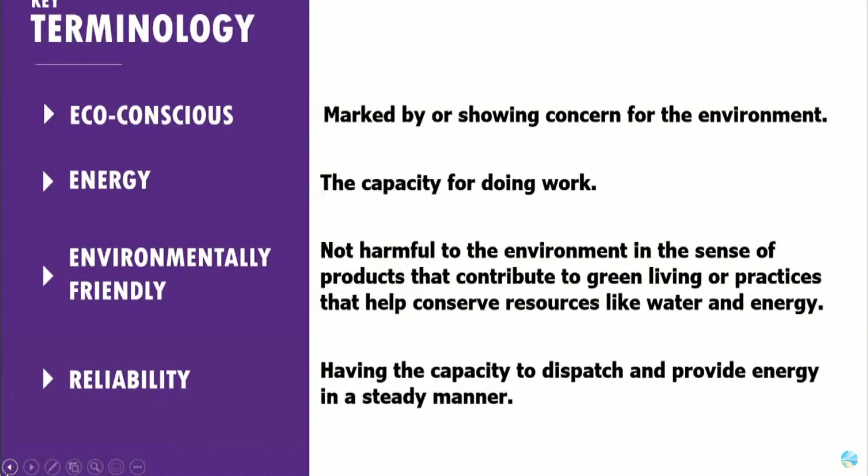So what is renewable? It's quite simply energy from a source that is not depleted when used, and quite often the fuel source is free. Resiliency is the ability of a piece of infrastructure, system, environment, or community to sustain or recover its essential functions when presented with a disruption. And finally, of course, sustainability: meeting our current needs without compromising the ability of future generations to meet their needs as well.

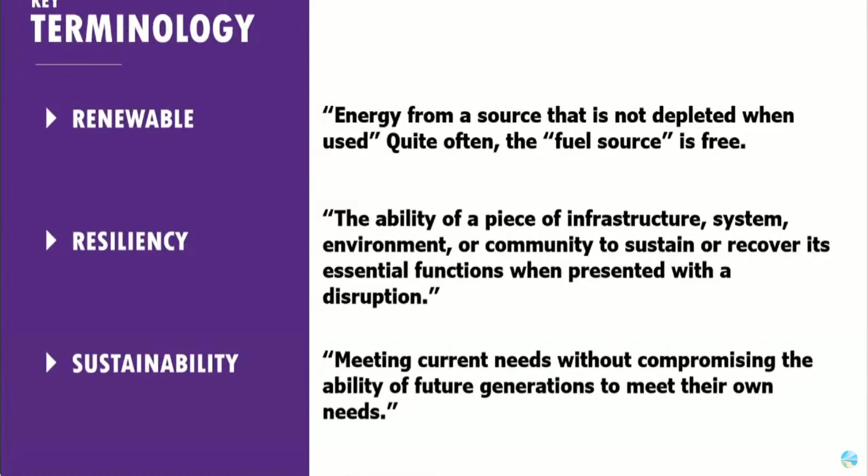So if we look at this landscape, let's just start simply. What does energy look like right now? In the United States, it's a very diverse energy mix: 34% is natural gas, 35% is oil and petroleum, and the rest consists of nuclear, coal, and renewable energy.

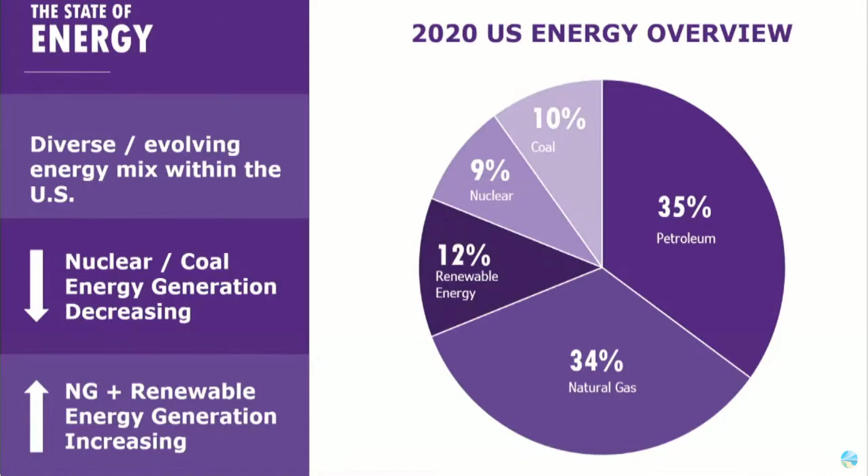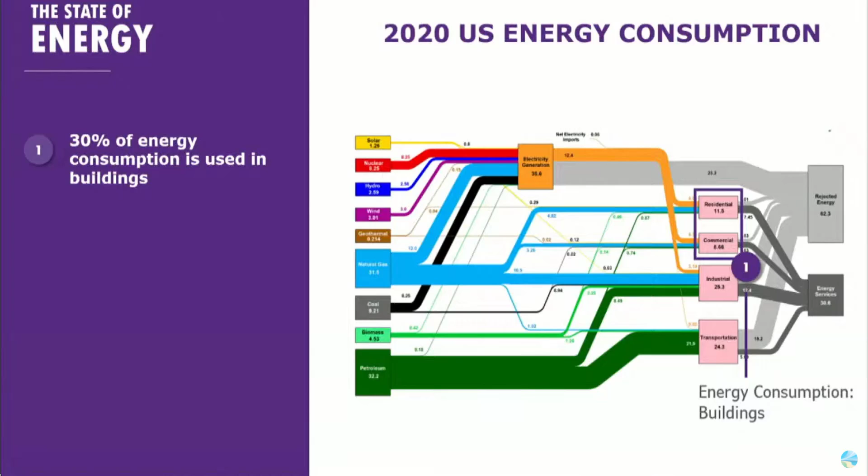So what we're seeing is that nuclear and coal energy generation is decreasing, while natural gas and renewable energy generation is increasing. If you look at this Sankey chart, a flow chart essentially, not quite as scary as perhaps it looks, 30% of all energy consumption is used within buildings. Natural gas is an integral part of that, so around 40% of all energy within the United States consists of natural gas.

In fact, 40% of electric generation on average in the United States is natural gas, 75% in Florida itself. And then you see the rest made up of nuclear, coal, et cetera.

So renewables are on a significant growth trajectory, right? We all know this. So what do we do about that, and how do we harness that? Unfortunately, two-thirds of this energy is lost. From primary source energy, from where we get it from the well or wherever it is, unfortunately we lose two-thirds of all that energy. So there's significant opportunity there.

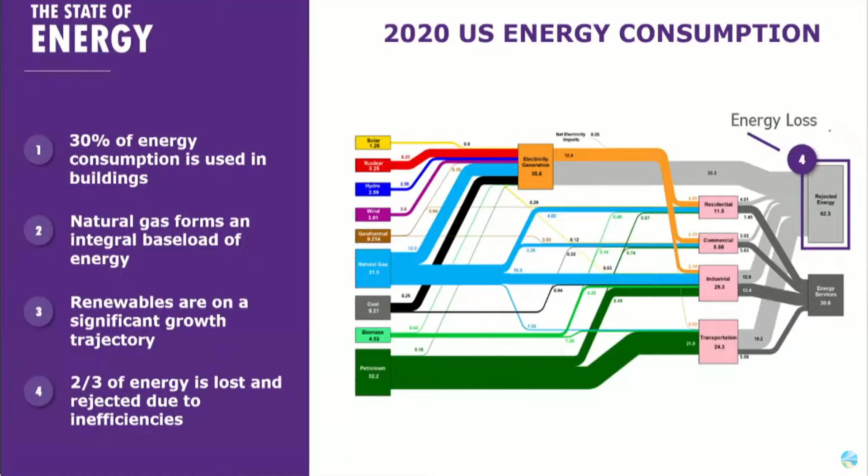So if you look at the natural gas infrastructure, it consists essentially of production, transmission, and distribution. Pretty straightforward. And as you can see, on the transmission side, some of that is used directly in industrial applications, but it's also used for gas power generation.

Within the state of Florida, 75% is used for electric production. The rest is made up of nuclear, coal, and renewables, and very little hydro, I believe.

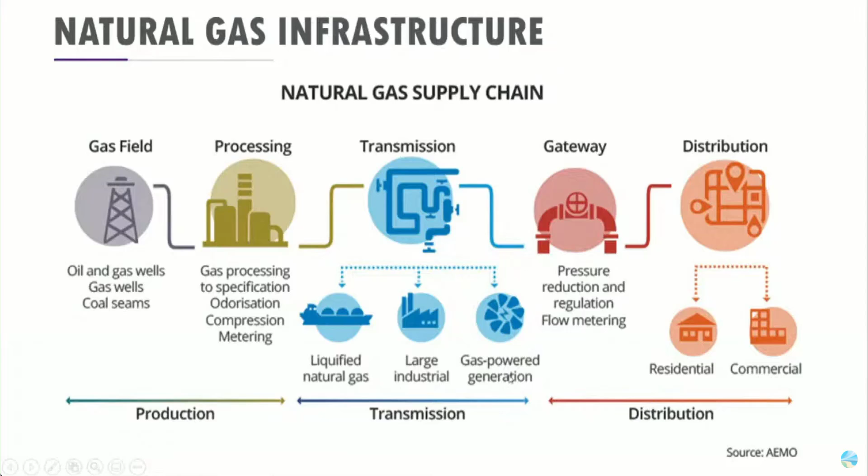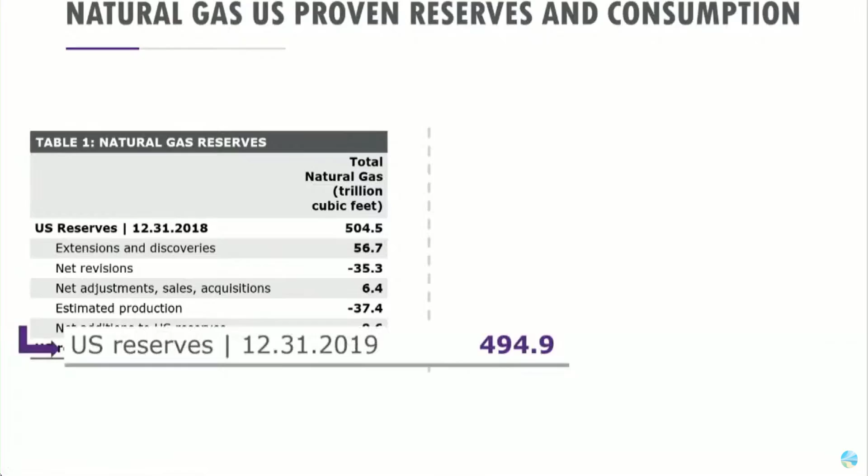So what are our natural gas reserves right now? We have close to 500 trillion cubic feet of natural gas within the U.S. itself. These are what's called proven reserves that we know of and can access right here. We have much larger reserves as well, which I'll talk about in a minute.

If you see that consumption, some amount goes to electric power generation within the entire U.S., and a lot is also made up of residential, commercial, and industrial use. We use around 30.5 trillion cubic feet. You can do the math: if you've got around 490 trillion cubic feet of proven reserves, and we're consuming around 30.5, you get around 16 to 17 years available within the U.S.

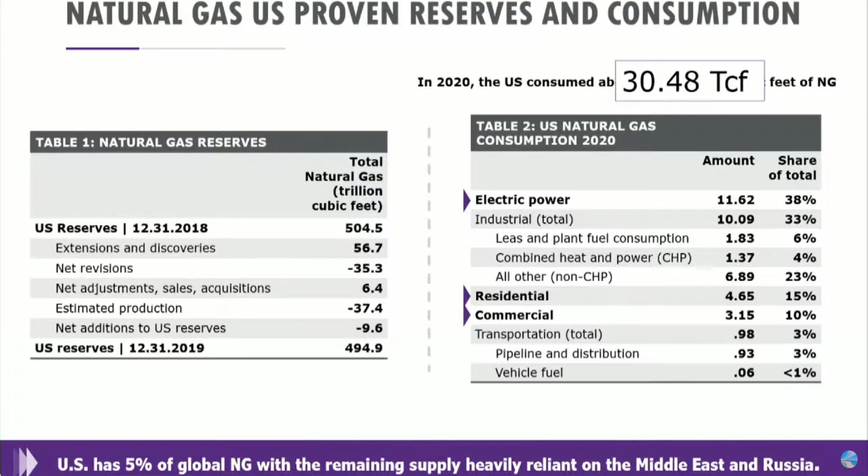Having said that, two things I'd like to point out. First, the U.S. is around 5% of all proven reserves within the world. A lot of it is within the Middle East, Venezuela, and Russia particularly probably has the largest reserves in the world.

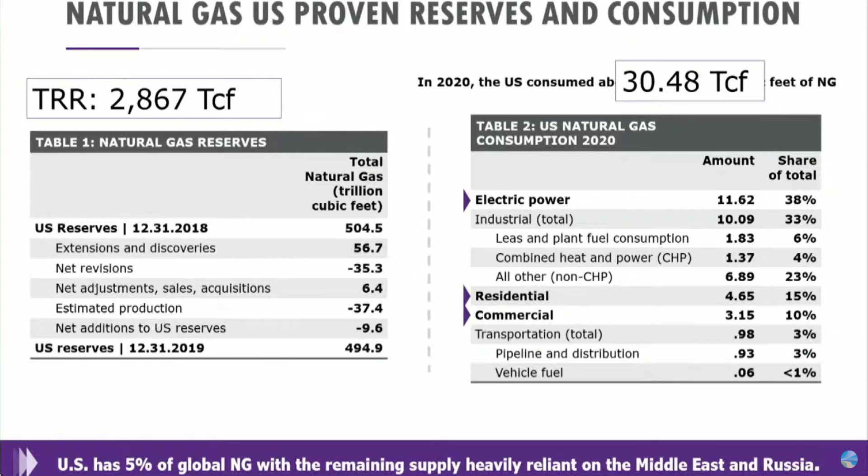But the technically recoverable resources are around 2,900 trillion cubic feet. That means it's not just the proven ones, but also the unproven ones, and they're not necessarily economically viable. Even using that figure of 2,900 trillion cubic feet, you get around 95 to 96 years of lifespan.

So just to quickly overview what natural gas looks like: it is certainly very cheap, one of the most economically viable fuels in the U.S. and in fact in the world. It has 50% of the CO2 emissions of coal. It's reliable, it's controllable, you can dispatch it whenever you need to, and it has what's called a high capacity factor, which I'll get into shortly.

However, it is a bit costly to store. It can be prone to explosion if not treated or handled properly. Hydraulic fracking has some issues as well, particularly to the water table. It's not renewable in that sense—we have, as I showed, potentially around 100 years, probably less. And there are methane emissions on this.

CO2 is a greenhouse warming gas, one with greenhouse warming potential. Methane is around 30 times more, and nitrous oxide 300 times more. Although the lifespan of methane is measured more around 10 years, whereas CO2 is around 100 years or so. This chart compares CO2 emissions per kilowatt hour in generation from natural gas to all these other different types of fuels.

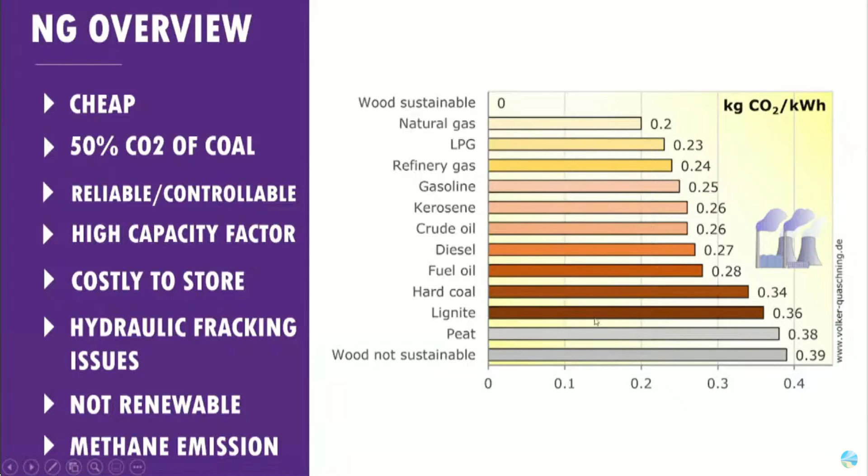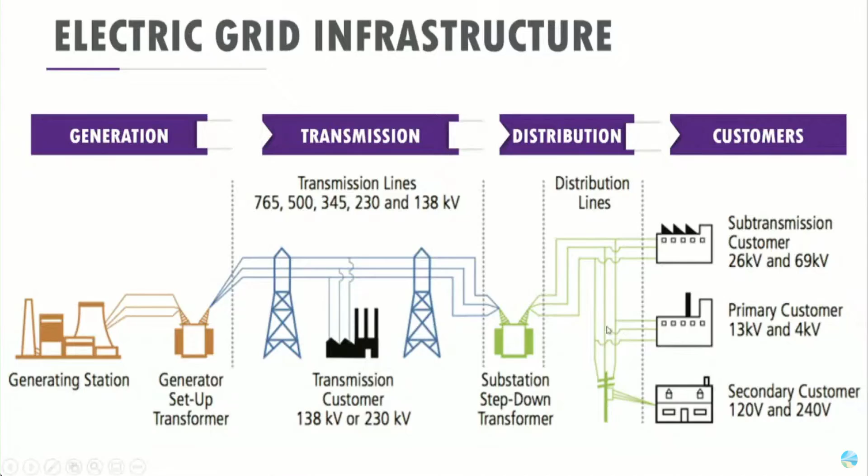Let's shift to the electric grid, and then we'll move back to another comparison between the two. The grid, as we all know, we've been hearing a lot about in the news with Texas, the Northeast, and so on. I myself grew up in the Northeast and also in Canada, so we know there have been issues up there too in terms of grid reliability. But it essentially consists of three or four things: generation, transmission, distribution, and finally usage by customers.

If you look at that infrastructure, and how renewables might fit into it, they fit in quite nicely—you could have central renewable generation, renewables plus storage on the transmission side. And within the actual distribution network, at the load side, you can fit in scalable renewables as well. Of course, it allows for EV integration, which we're seeing a lot of as cities try to electrify their fleets.

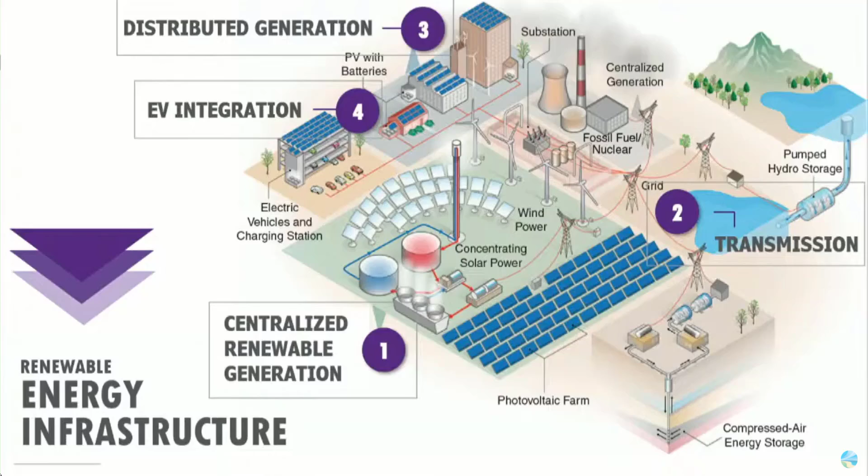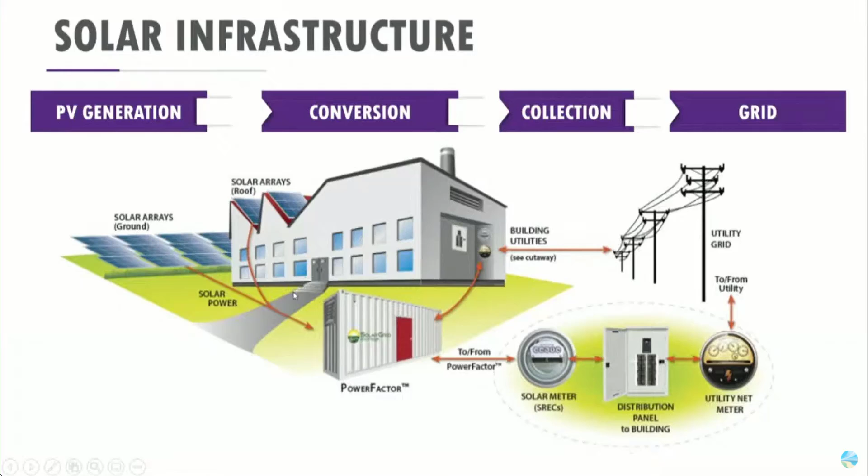So what does the solar infrastructure look like? There's PV generation, as you can see on the left side, consisting of PV arrays. There's conversion from DC to AC, then collection, and finally putting it right onto the grid.

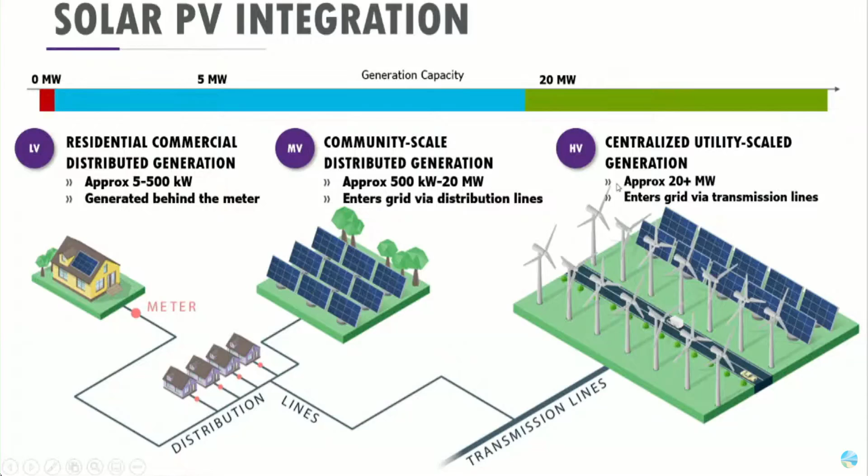In terms of solar, as I said, it lends itself scalable from very small systems up to around 500 kilowatts—these are typically behind-the-meter distributed generation. Community scale integration is 500 kilowatts to around 20 megawatts, and then finally very large scale systems, 20 megawatts plus. You can see this is what it would look like. Now, if you look at something called the levelized cost of electricity—no discussion on energy is complete without understanding economics.

One way to measure economics is something called LCOE, or levelized cost of electricity. That is simply the sum of all the costs over the lifetime, the OPEX and CAPEX, divided by the sum of electrical energy produced over the lifetime, typically 20 to 30 years for a lot of renewables.

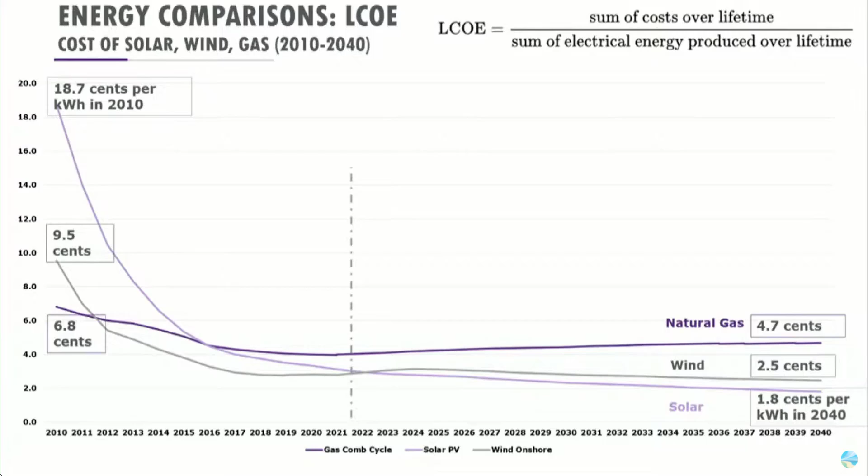So what about small solar? Is that economically viable? We'll get into that in a moment.

If you look at residential PV systems, the cost of installation has come down considerably too. We're looking at around $2.70 or so per watt for residential install, $1.72 or so for commercial, average throughout the country, and less than $1 a watt for utility scale. That was kind of the magic number that NREL and other organizations said they wanted solar to be at, and we have indeed achieved that.

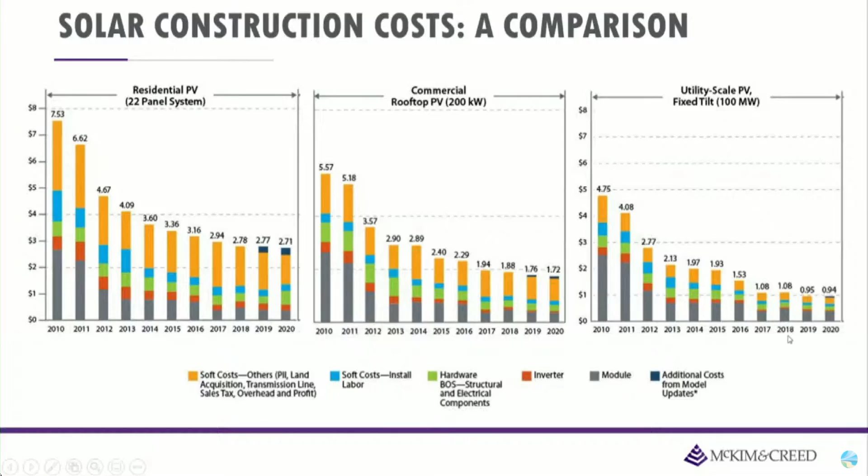Grid parity, that's the key word. That's great, but solar has a big, big problem, and let's be fair about this: something called capacity factor.

Capacity factor is the actual energy that's produced compared to the ability for that system to produce energy, or what it should be producing. In other words, if you ran it over a 24-hour period, what percentage of that period are you actually getting energy? Solar has the lowest, 24 to 25%, compared to nuclear, 93% capacity factor.

Or if you look at natural gas, above 50%, 50 to 60%. So that means if you're running that plant over a 24-hour period, you can effectively run it for more than 12 hours and get energy. You can't do that with solar.

Your fuel source may be free, but unfortunately you're beholden to Mother Nature. When there's no sun, you ain't got no solar, right? So as I like to joke with some people, solar works great on sunshine, but unfortunately it doesn't work very well on moonshine. But there are other applications for moonshine, I'm sure.

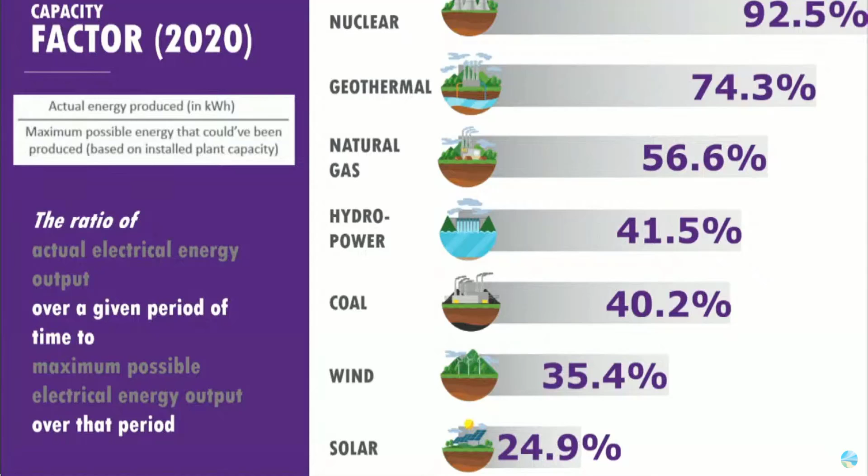So, PV overview. If we summarize PV itself, yeah, it's very cheap. Absolutely, it's now the cheapest form of creating new energy. In fact, a lot of utilities are installing solar. It's the largest growth trajectory in the U.S. in terms of new installs. It's 5% of the CO2 of coal, as opposed to 50% for natural gas.

Minimal O&M, your operations and maintenance cost is quite low. It has now the lowest LCOE, levelized cost of electricity. There is minimal to no air or water impact. It's renewable, it's free fuel, but it's got a problem: it's not controllable, it's not dispatchable.

If you're a utility, one of the most important things for you is steady the ship, steady as she goes. You want a level curve, a straight line. Utilities like to be boring. Boring is good, reliability is good. So, unfortunately, solar is not reliable, it's not controllable, and it has the lowest capacity factor.

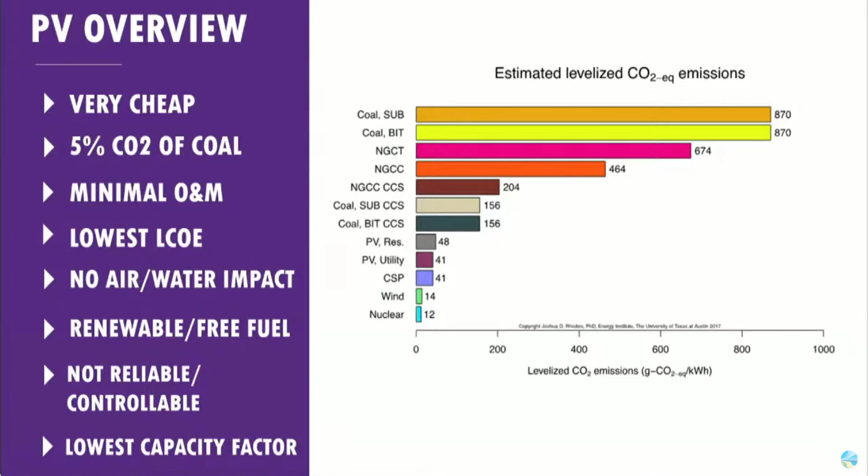Okay, can we do something about that? Here is a bit of an eye chart, you guys can have a look at it later on, just comparing things in a bit more detail. But the key points here are natural gas is a fabulous base load. It works, it's reliable. It has issues, though, that we know about.

What can we do? Enter solar. It can help mitigate some of those issues in terms of emissions, in terms of environmental impact.

But unfortunately, solar by itself is not controllable. The key word is dispatchable. A utility wants something that's controllable and dispatchable.

If you look at capacity-weighted construction costs, they're more or less in line with each other now. To create a new plant, costs with natural gas versus solar is more or less the same. And if you look at utility scale levelized cost of electricity, solar is in fact cheaper.

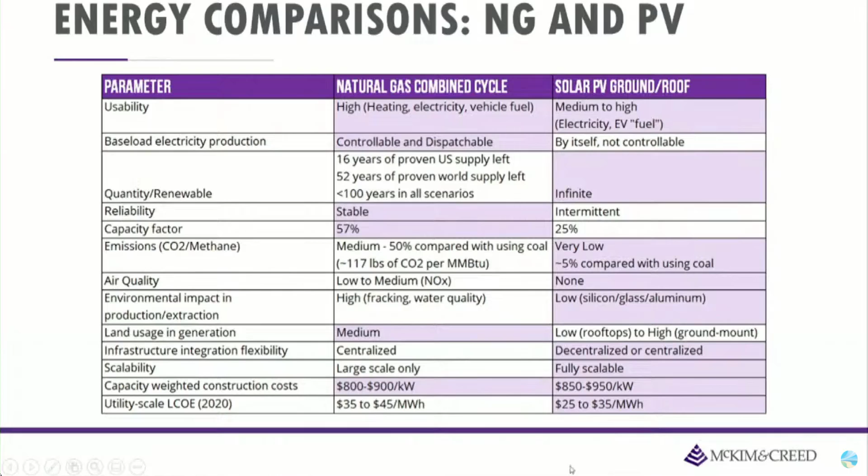That's utility scale, understandably. So we did some modeling here at McKim & Creed. We took a 100 kilowatt system and a 300 kilowatt system, and we did some return on investment analysis using industry standard tools, and we can certainly do a lot more of this as well. This was something called System Advisor Model, a tool that can look at economics.

So you can vary the cost of construction. Looking at that for a 100 kilowatt system, based on your assumptions - discount rate, whether you take on any debt or not, whether you own the system, whether it's a PPA, etc. - all of that can be done. So I did one basic one for 100 kilowatt.

I'm seeing around 8.6 years simple payback for a 100 kilowatt system. Now granted, that would be a little bit more based on the cost of installation, so I used around $1.72 a watt with no incentives. But if we're looking at $2, $2.25 or whatever, we're still looking at around under 10 years or so for 100 kilowatts. So this is a commercial PV system on a rooftop, let's say.

The levelized cost of electricity, real, is 5.4 cents per kilowatt hour. That's not too shabby. And as the system grows larger, as you install a larger system, you're looking at around 5.3 cents or whatever.

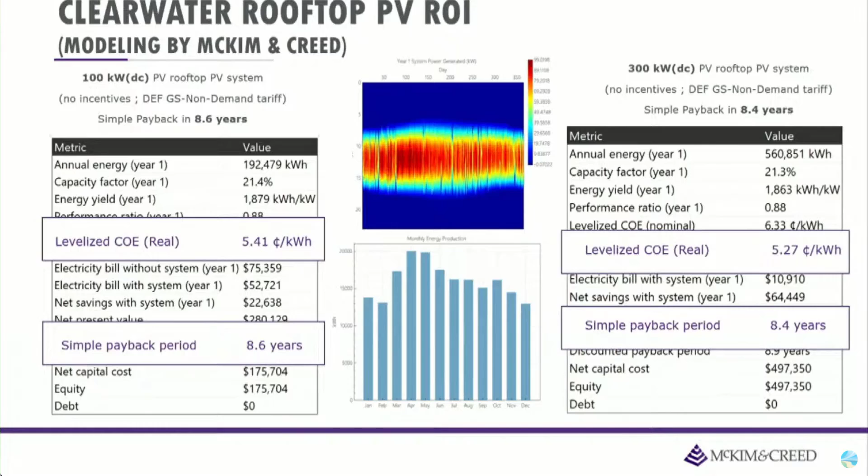Let's shift gears, so to speak, to looking at the motor vehicle infrastructure, the electrification of the fleet. If you look at well-to-wheel efficiency for petrol or gasoline vehicles, you're looking at an overall 13% efficiency. So while you have a pretty good refining efficiency for oil, around 80%, by the moment it goes to the wheel itself there's a tremendous amount of loss - you've got 16% efficiency there for an aggregate of 13%.

Electric vehicles have a main advantage, even though the grid, I should say, is not that efficient unfortunately. You're looking at 31% efficiency from generation loss and transmission loss. The vehicle itself is 76% efficient, or more or less. So an overall 23% efficiency.

In the reference slides, which we have shared with you as well, you'll also see what it looks like from natural gas - what about if you were to just burn that natural gas directly for compressed natural gas vehicles? What about hydrogen? So there are various figures of merit there too. You're still looking at electric vehicles being more efficient. It's the laws of thermodynamics, the Carnot heat cycle, versus the laws of electromagnetics.

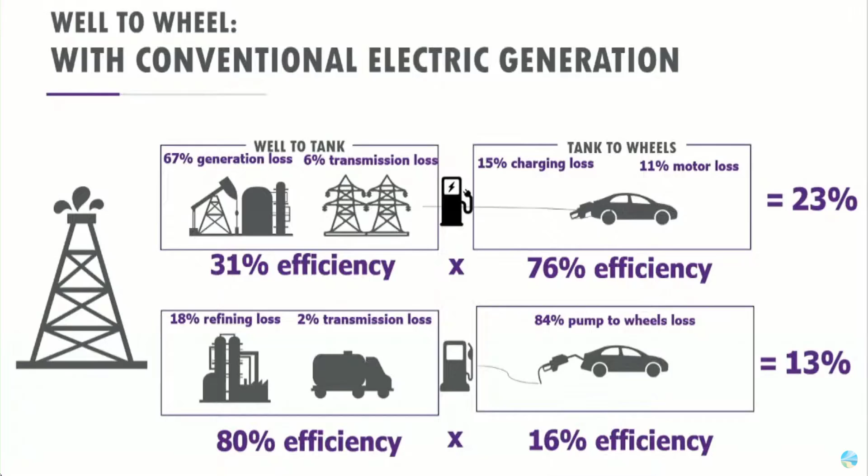Electricity, when used directly, not for heating purposes, is just far more efficient. But when you burn fuels, they are more efficient for doing so, but not so much for conversion necessarily to electricity or for direct final use at the load level or appliance level.

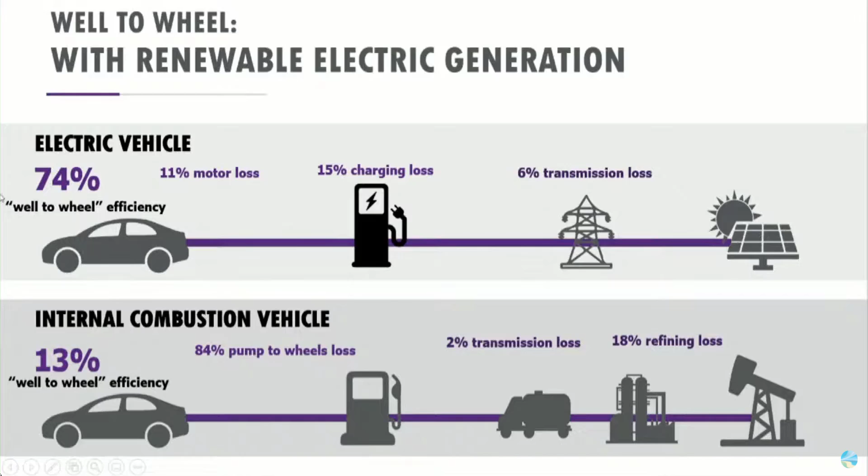So, but what about if you change that picture to use renewables instead? The internal combustion engine using gasoline, as we said, is around 13% efficient. The electric vehicle, when using solar or renewables, because there are less transmission losses, that figure from 23% jumps up to 74%.

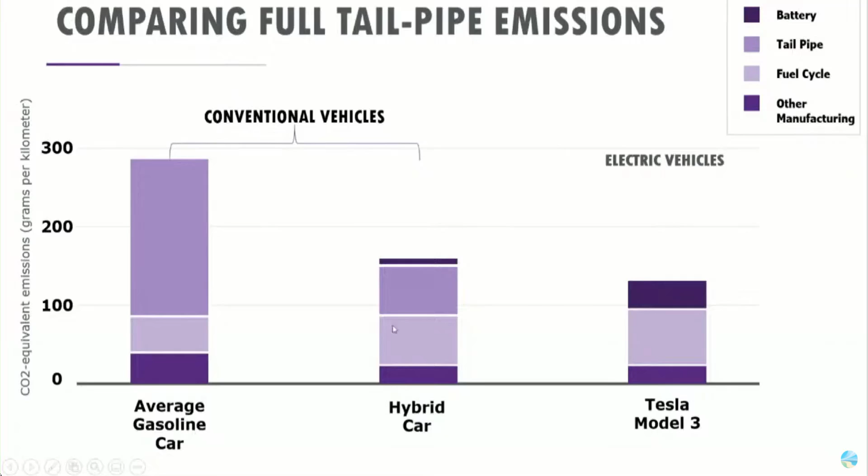What about full tailpipe emissions, the cost for creating batteries, the cost for creating motors and so on? If you look at that, you're still seeing, in terms of full tailpipe emissions, less than half for, let's say, an electric vehicle like the Tesla, an all-American made vehicle, Tesla Model 3, versus an average gasoline car. A hybrid car sits in between there, like a plug-in Prius or the like.

So, having said all that, we've looked at the issues with natural gas, we've looked at the issues with solar, we've looked at the opportunities with natural gas, the pros and cons, and also the opportunities with solar. What can we do to kind of combine all this together?

Well, I would say the first thing is energy efficiency. The best use of energy is no use of energy at all, right? We would be remiss to forget about energy efficiency. In fact, I was just hosting a panel 2-3 weeks ago with the Association of Energy Engineers, and we had Dr. Marilyn Brown, who's a Nobel Peace Prize winner in 2007 I believe, and her comment was: energy efficiency is the first fuel.

The first fuel. Energy efficiency is the least cost energy resource, and this wedge - what we've done over the last 10, 20, 30 years - we've saved more by better appliances, using more energy efficiency, than all of new construction or new energy creation. It is a fabulous wedge.

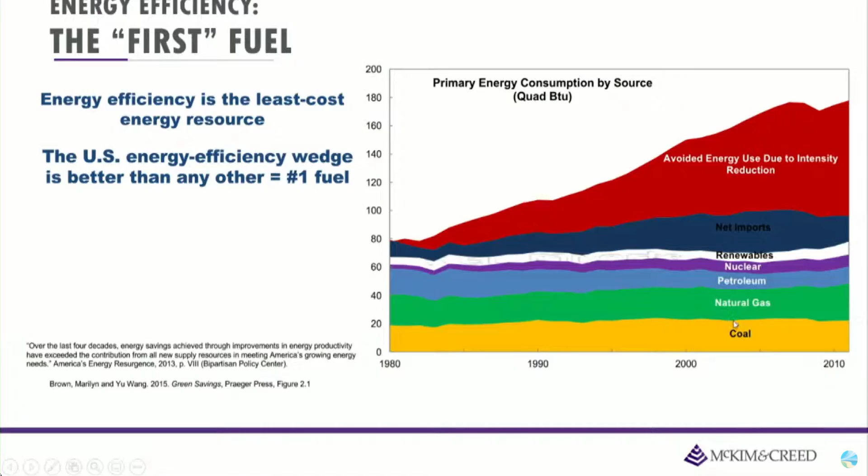So efficiency through equipment upgrades and strategies - right sizing, right timing. When do you put those energy efficiency measures in place? I'm happy to see that in Greenprint, you do talk about that in the revised Greenprint. There's discussion of education, awareness, behavioral changes - all of those are integral to energy efficiency, along with the right equipment at the right time. If you combine all of that together, you have low-cost efficiency strategies combined with equipment upgrades and behavioral changes.

Then you couple in clean energy generation, and you've got a potent solution. But that's still not enough - that doesn't solve the problem of renewables. They're not dispatchable. You have issues as such.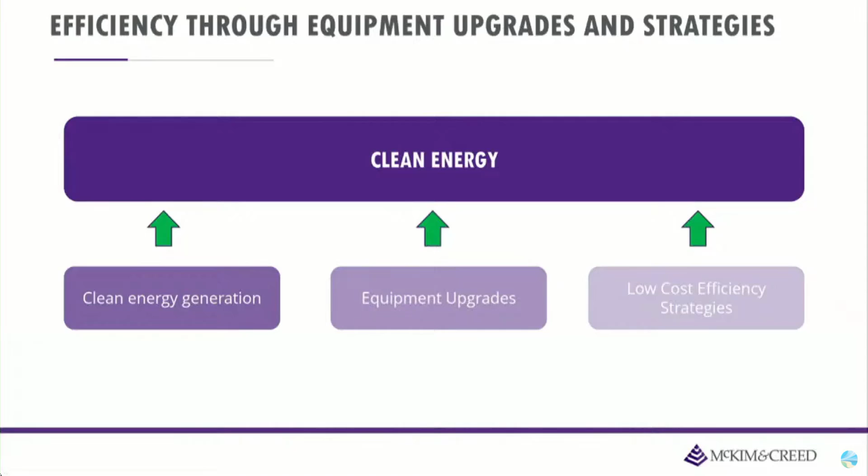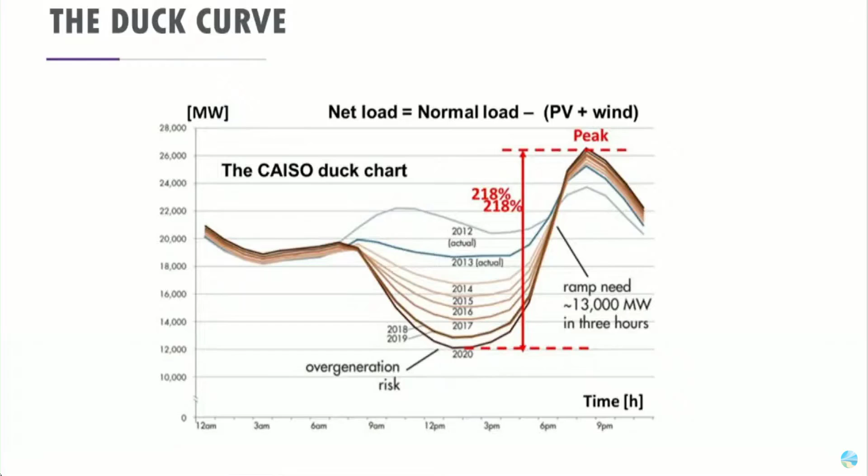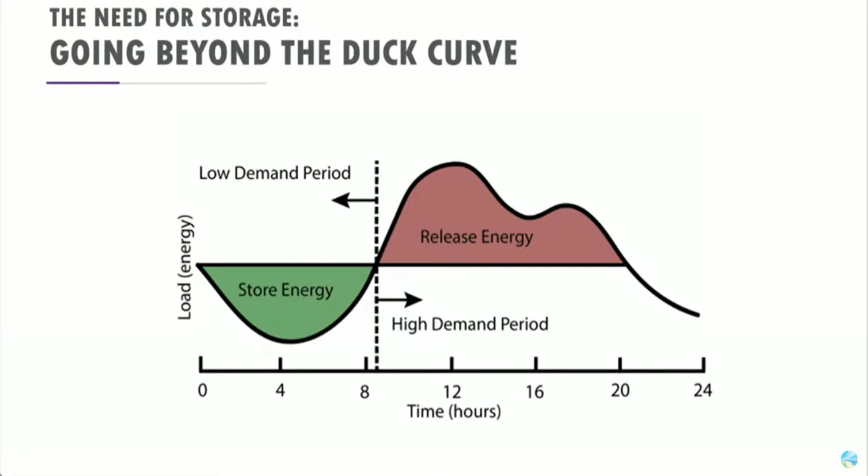But we got to do something about this. Every cloud has a silver lining, right? There is no silver bullet, but there are other silver things we can use perhaps. If you look at this, over a 24-hour period you've got creating energy, but what you could do perhaps is store it - store it and dispatch it. Now you can bring control into the picture. That's what you ultimately need - control, a means of regulation. Power is great, but power without regulation and control ain't worth anything, so to speak, to coin a phrase.

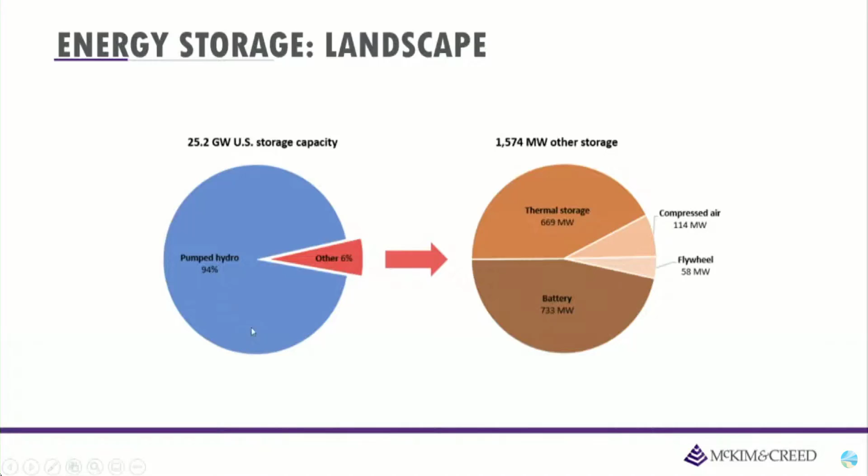So energy storage - that landscape is changing. What we saw in wind started over 15, 20 years ago, and prices dropped. Solar, that evolution started more or less 10 years ago, and prices dropped dramatically. We're now seeing the same thing over the last 2 years for energy storage. Most of energy storage is pumped hydro in the United States, but the rest consists of thermal storage and batteries, electrochemical batteries, flywheels, even compressed air systems as well. We're still looking at 90% plus in terms of pumped hydro, but the rest of that puzzle is expanding, allowing distributed energy storage systems rather than just centralized.

What the new type of energy storage can do is it can respond quickly - it can respond to address things like regulation, voltage stability, power quality, all these things that utilities are looking at to make our grid stable. We have an issue, let's face it. We're seeing it in Texas, we're seeing it in the Northeast, we're seeing it all over the place.

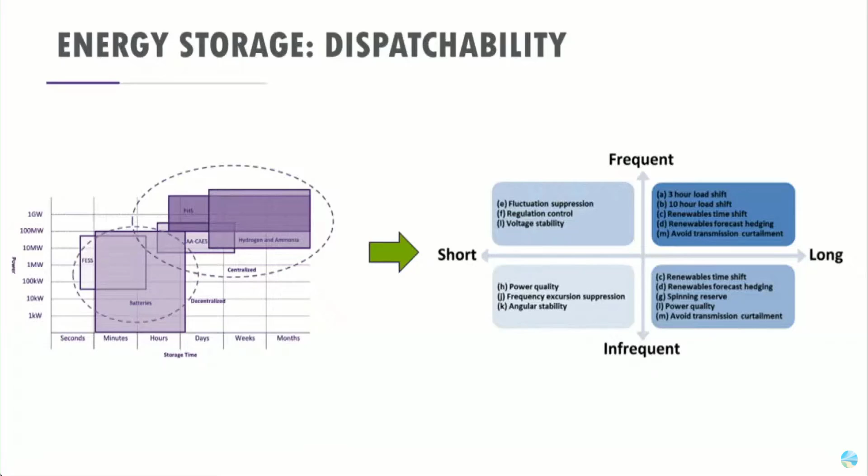We need to make this grid stable one way or another. We need reliability, we cannot suffer outages. Sustainability has to be coupled with reliability and resiliency. We just can't have sustainability on its own. We need reliability, we need resiliency, and energy storage is a means to address that.

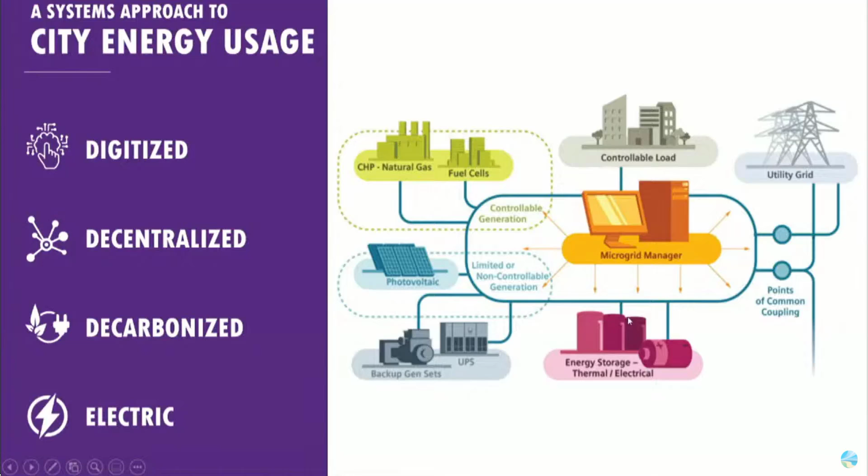But let's step back even more and put in smarts—something called a microgrid. It scales up, whether small on a commercial level or large. What is a microgrid? It's a means of creating a power system with intelligence locally, within a well-defined boundary, that combines smart loads, renewable power systems, including turbine and natural gas power systems and energy storage, in a comprehensive fashion that can both connect and disconnect with the grid. It's sexy intelligence with control and all the resources to bear. It's digitized, it's decentralized, it's decarbonized, and it's electric.

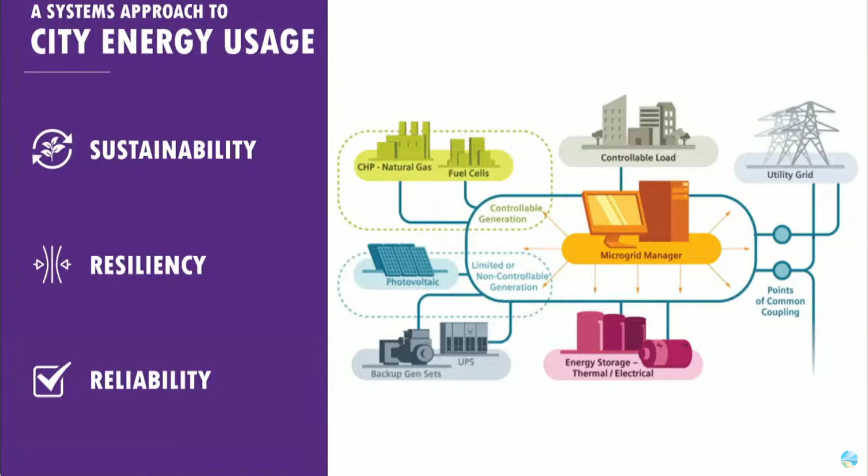And it answers that call I said before: you can't have sustainability without resiliency and reliability. So the value of microgrids is that they're localized and distributed. And in fact, utilities are working on it. I worked on one with Duke Energy in North Carolina, the Hot Springs microgrid near Asheville. There are many utilities and companies now involved in doing microgrids because it makes sense and it's more and more economically viable.

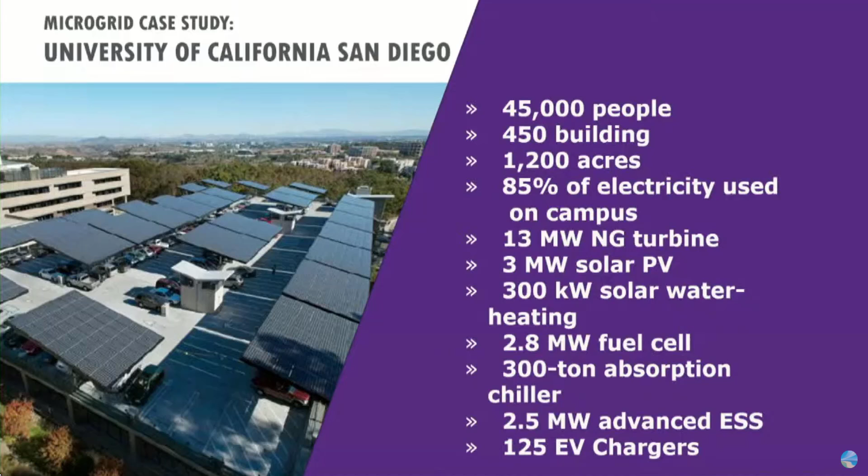So I gave him a call a few days ago and asked, Byron, how's it going? He said, fantastic, we're expanding it. It is now cheaper to create our own energy than to take it from the utility. In fact, we even help the utility by feeding back some of that energy, especially in times of crisis. We need resiliency, we need reliability, but we also need sustainability. There's natural gas cogeneration on site, solar resources, everything combined together.

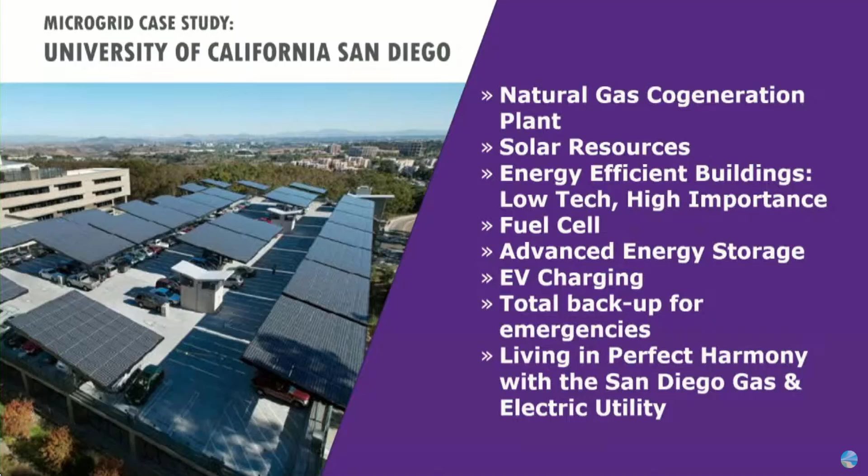A building I worked on at the Georgia Tech campus a few years ago is called the Living Building. It's 34,000 square feet, and I was happy to look at it from the load side when I went back to school—my background is electrical engineering, but I also did a degree in architecture, particularly high performance buildings, because I wanted to understand how you use that energy. It's great that we engineers love to create energy, but you need to complete that circle and understand its usage. This building is a living testament in Atlanta, Georgia.

It has a 340 kilowatt PV system that produces more than 40% of its energy. Not everybody would agree from an aesthetics perspective that having a canopy on top of the building is the most pleasing—I happen to like it, and it works effectively. It also has a green garden on the roof, which provides shade to the building too. This building truly combines all of this together: energy storage, photovoltaics, and a chiller plant as well, fed by the campus.

So if we were to do an energy feasibility study, what would it look like? It would look like this: understand what the needs are, understand where you are right now, take stock of the building stock, look at the operational challenges and what is going well for you. Don't just come in and propose solutions, but understand what's actually going well right now. Identify the opportunities—what are the business models that really work here? Do a sensitivity, environmental impact and risk analysis, and look at the roadmap going forward.

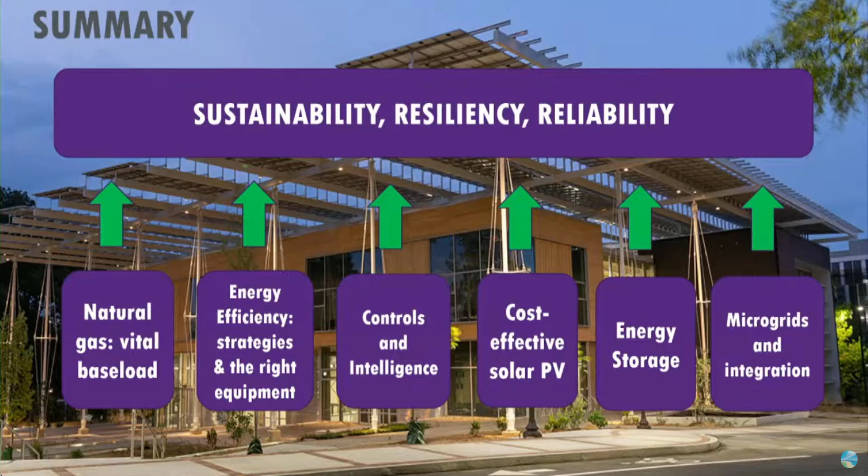In summary, there are six things that will get us to a sustainable, resilient, and reliable future. Look at natural gas as a vital baseload—it's reliable, dispatchable, and controllable. Look at energy efficiency strategies: right equipment, right sizing, right timing. Integrate controls and intelligence. Look at cost-effective solar PV systems—you've seen some of the ROI. Look at the opportunities for energy storage. And finally, learn from what people have been doing in terms of microgrids and integration. Thank you very much.